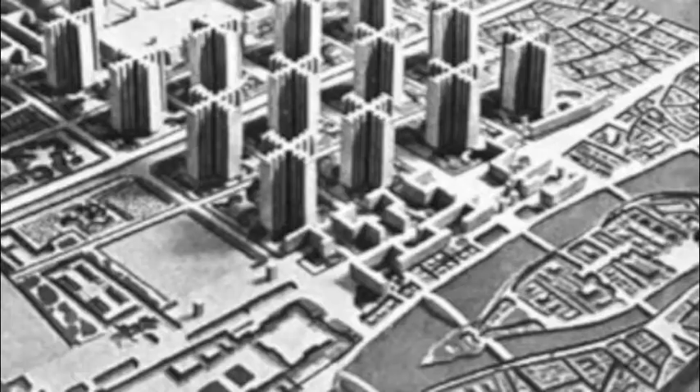But by the 1920s, modern designers began to embrace new technologies and the possibility of mass production. The aesthetic of the machine then became a central theme in modernism. Two figures in particular promoted the language of industry: Walter Gropius and Le Corbusier.

The 5 points of modernist architecture are: the pilotis, or first-story columns free of walls that raise the house above the ground; second, the free facade, where exterior walls are no longer load-bearing and separate the interior space from outside.

Third, the ribbon window: the horizontal length of fenestration as uninterrupted bands. Fourth, the free plan: separation of load-bearing columns from walls subdividing the spaces. And last, the roof terrace, constructed with sand covered by a thick slab laid with staggered joints sealed with grass.

As an architect, I was always looking for innovative ideas for 20th century architecture — maybe pilotis, free floor plans, free facade, horizontal windows, or maybe a roof garden. Ladies and gentlemen, I hereby present you my masterpiece, Villa Savoye.

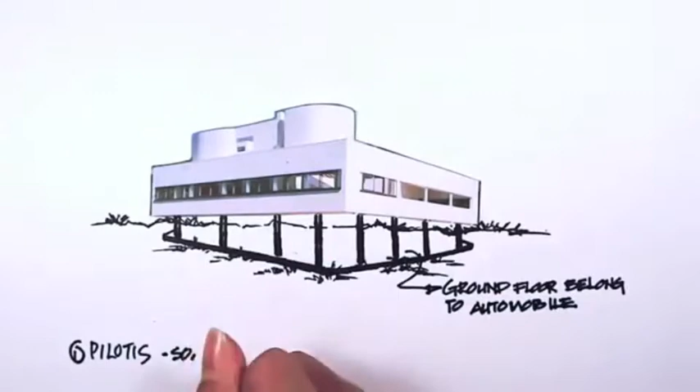So let me explain my first idea, the pilotis. I raise up the building because I believe the ground floor belongs to the automobile. So the housing, or the living area, is on top of the pilotis to allow vehicle movement.

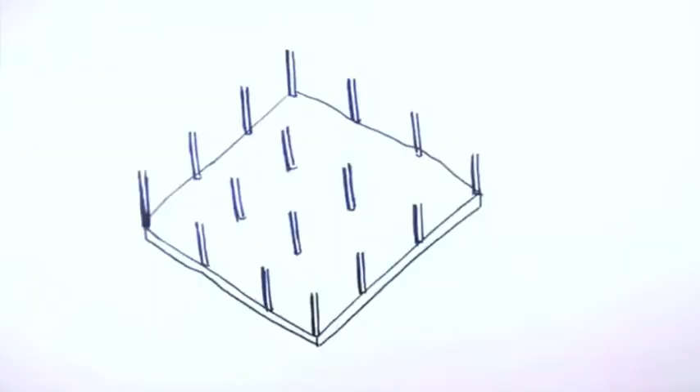The second idea would be the free floor plan. I believe there are no restrictions in space planning. A building's floor plan should be free from structural conditions, so partitions can be organized in any way.

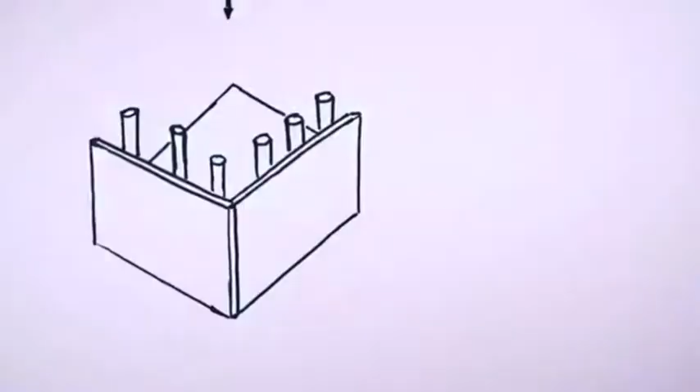Hey, wait a minute, this is not my design. The structure itself should be separated from the facade. Come, boy, let me show you how this should be. The structure itself should be separate from the facade to relieve it of its structural function.

For the top view, it should be something like this. Yes, and this is my idea of the free facade.

And so here comes my fourth idea, the horizontal window, or I call it the ribbon window. The facade has been cut along its entire length to allow the room to be lit equally.

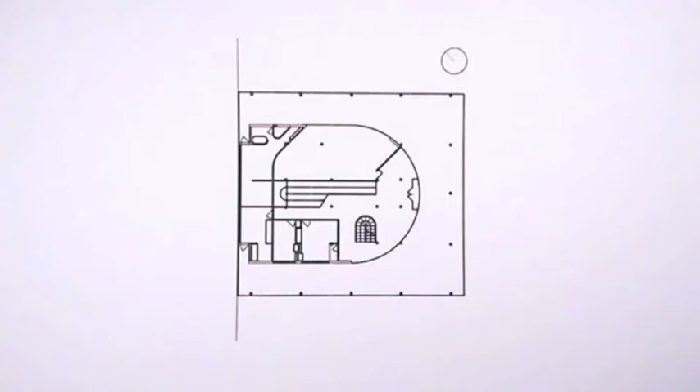So those are the 5 points of architecture. So now I want to bring you an analysis.

As you can see here, on the ground floor plan, the access of the car to the garage creates a curving movement along the pathway.

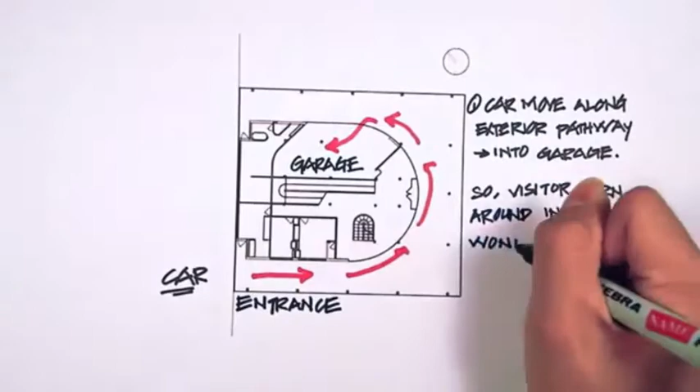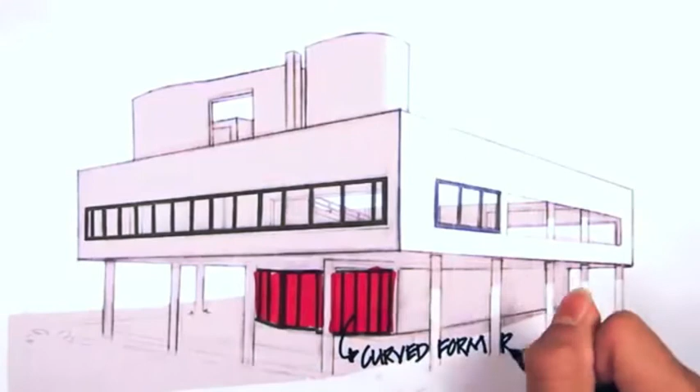So by driving through here, maybe you can experience something new. Why? Let me show you. The curved form of the window here actually reflects the movement of the car. And you know what — the radius of the curve is designed to match the turning radius of the automobile.

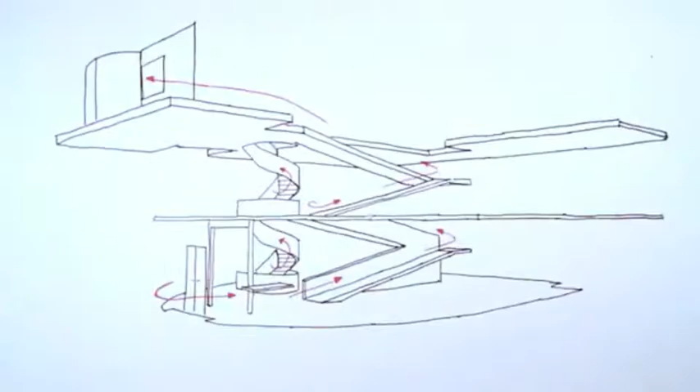So let's talk about connections. As you can see here, this is the interior of my masterpiece. There's a ramp and a staircase, and the staircase usually acts as a separation between two spaces.

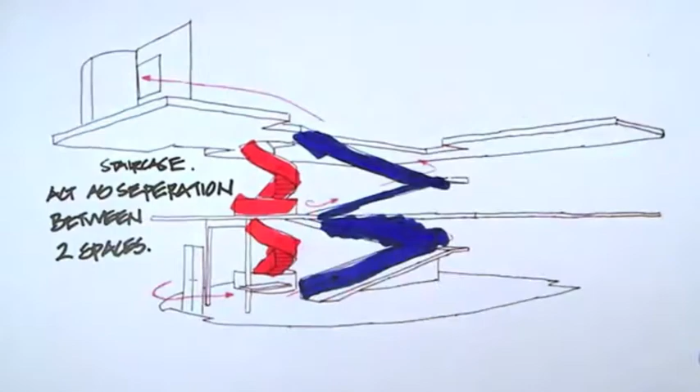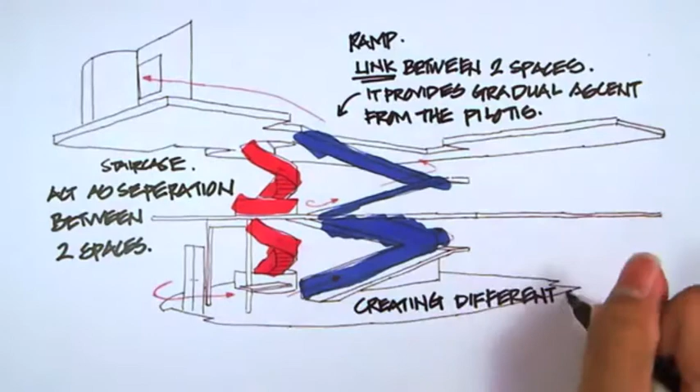I prefer the ramp more than the staircase. You know why? Let me tell you why. Because the ramp links two spaces together, and it provides a gradual ascent from the pilotis — and believe me, you will feel different.

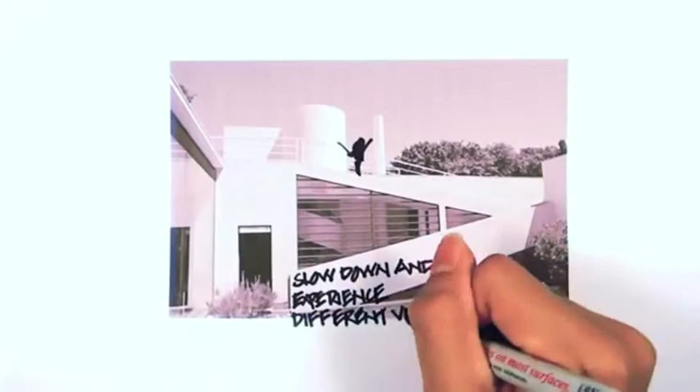That's me. So next time when you come here, slow down and experience it. See, I feel damn good.

Finally, moving to context. Sometimes people come and ask me, why does Villa Savoye look like it's floating? Let me tell you the answer.

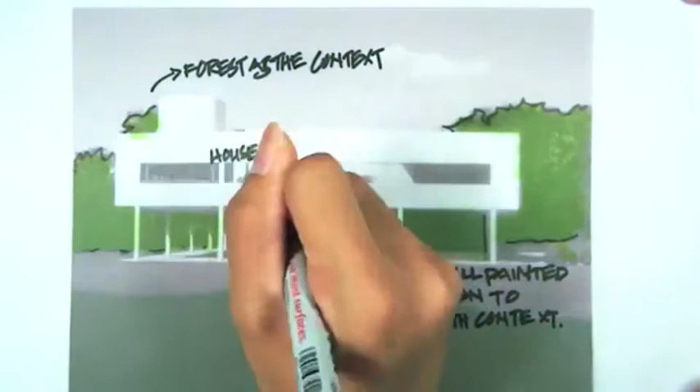It is because I got the forest as my context, and I painted the wall of the ground floor green, so it's kind of blended into the forest. And you know what, the pilotis actually dissolve among the tree lines.

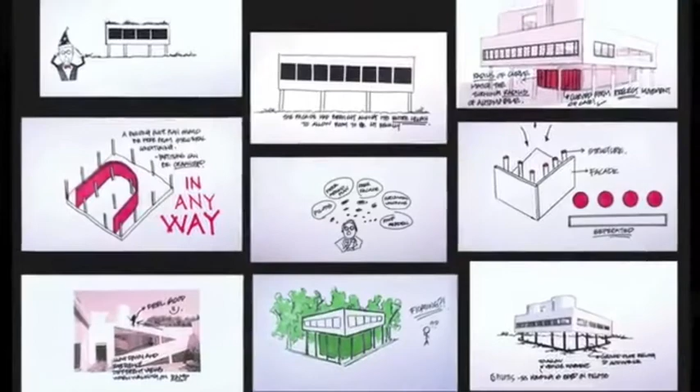So this is all about me and my masterpiece, Villa Savoye. There's one surprise I would like to give to all of you. And goodbye — Villa Savoye, machine for living.